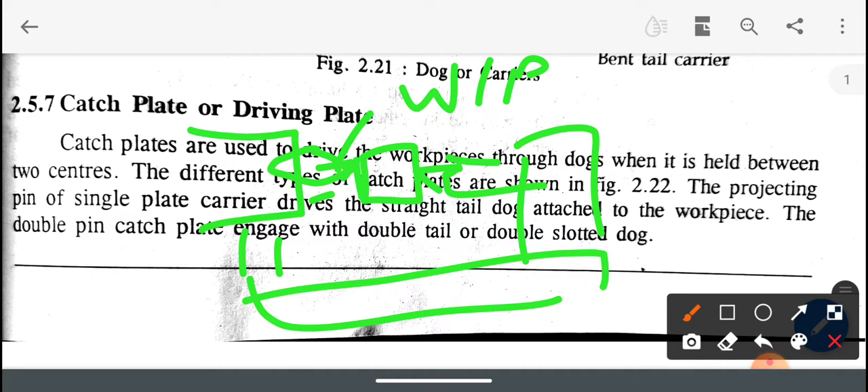When you hold very heavy workpieces between two centers, as already you know, a lathe machine has two centers. One is the headstock center where the workpiece is held. This is the workpiece, and on the lathe bed here is the tailstock, with the dead center in between, where the workpiece is held. So to drive very heavy workpieces we need good support, otherwise the job will be in vibration and there are chances of spoiling the machine surface.

So that's why, to protect the workpiece from damage or to give good grip, we need catch plates to drive the workpieces between the two centers. What are the different types of catch plates, we will discuss next.

We have got here the single pin catch plate. Here you can see the pin used is single, that's why it's called single pin catch plate.

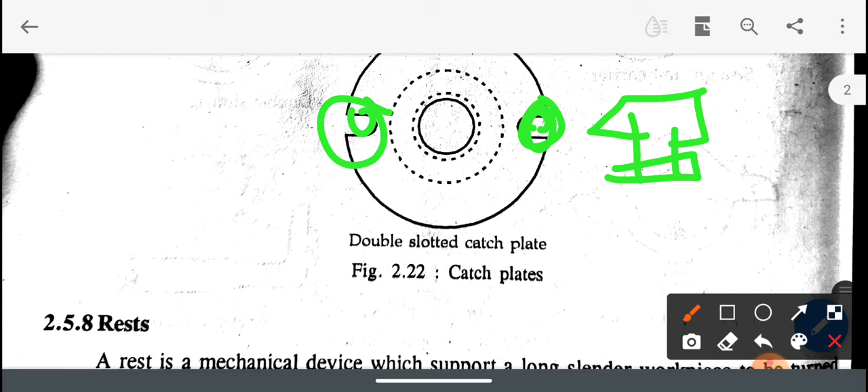Double pin catch plates, here the pins are two. Then there is the double slotted catch plate. Double slotted catch plate means here with the help of bolt and nut arrangement, what happens is it will be locked to the dog in this slot, and this catch plate is used to drive the workpiece. So to show this, I will show you a small video on YouTube so that you will understand clearly.

The animated video will help you understand very easily. These are the catch plates.

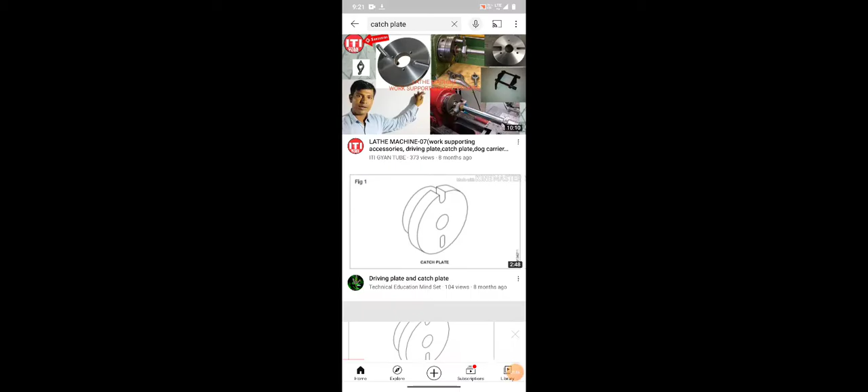I am looking for the animated videos.

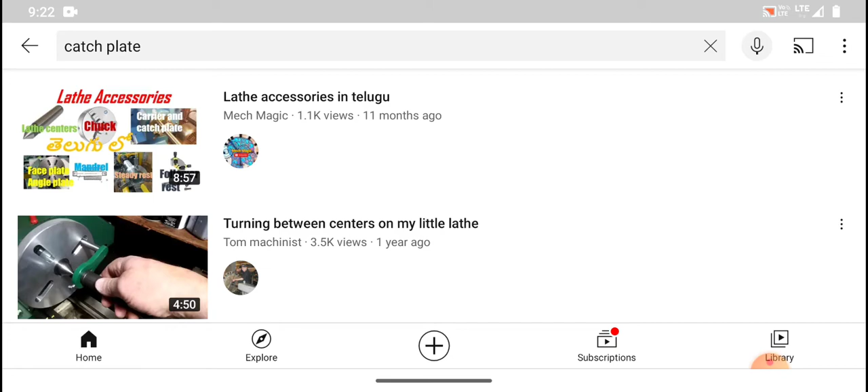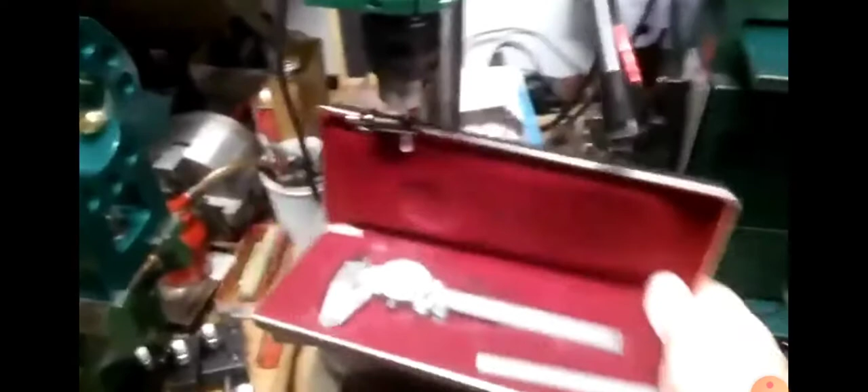You can see the lathe attachments. Welcome to my little machine shop. I have a toolbox, I have a drill press, just a little Harbor Freight drill. I'm going to try and do all of this one-handed, so forgive me if it gets a lot shaky and stuff.

But I'm going to loosen up my tailstock here and pull it back. I'll loosen it more. And out pops, hello, out pops the part. I have a center in.

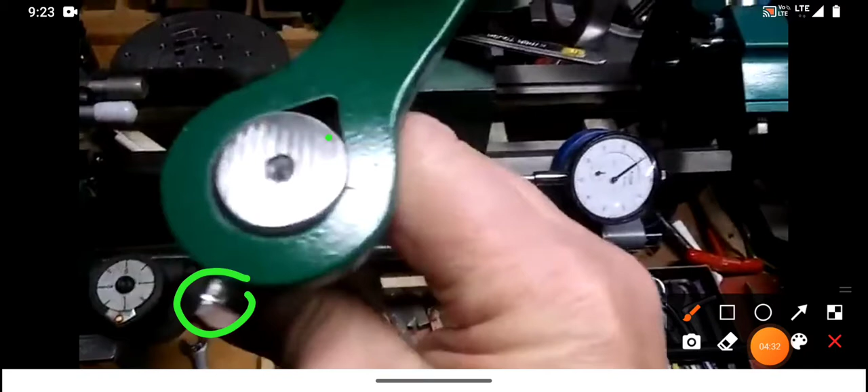This is one example of what is called the carrier. With the help of this screw, the workpiece is held and is rotated between the centers. This is a simple example of how catch plates will also be used.

At that end, in the tailstock end, I have a live center. This is called a live center, a number 3 Morse taper center locked into the spindle of my lathe. And this is my dog driver plate.

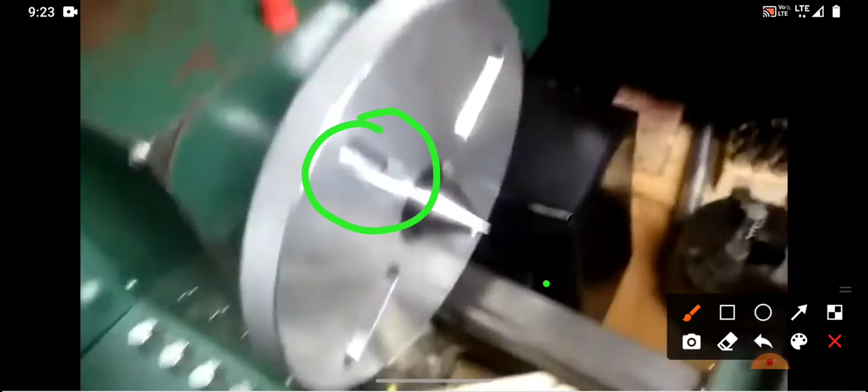Some people call it a face plate. It's really not, it's a driver plate. Down there is my face plate, that's made of steel with lots of tapped holes in it. This is just a dog driver.

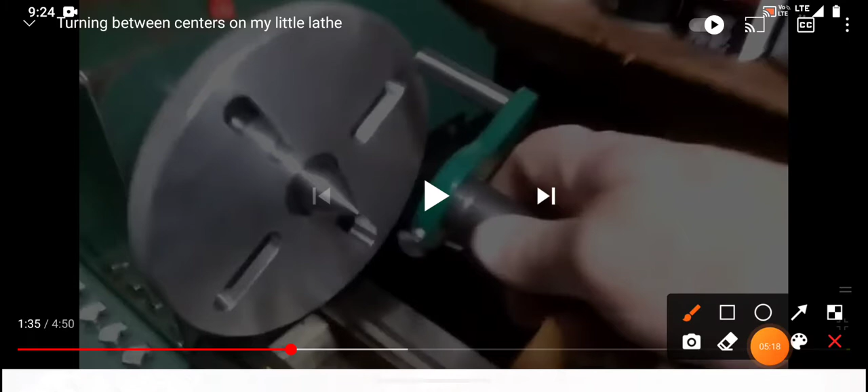This is the catch plate. So you have got one slot, two, three, four slots are there for holding this carrier. It is used - just see how it will be held here. This is a driver dog, which locks onto the part with a set screw.

Yes, I painted it green to match my machine, haha. But basically this tang here gets driven because it's engaged into one of the slots, and then the live center goes into that.

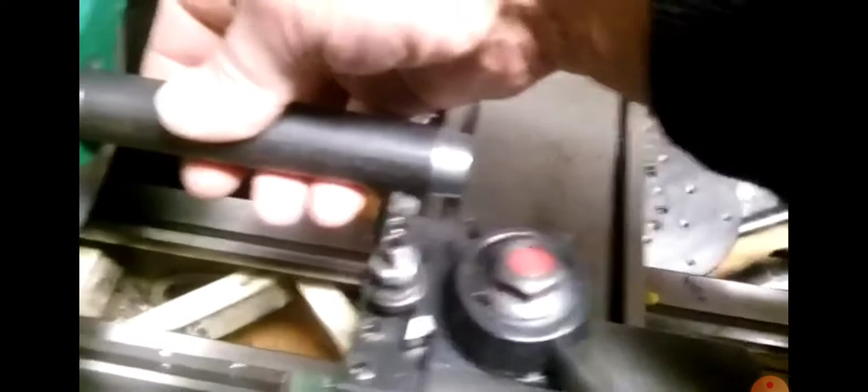And I can't do this one-handed, but I'm going to bring the tailstock back up and mount the part in there, so just hang on a second. Oh, there's plenty of tension now.

This is a live center where you have a driver dog like that. Most of the time we're just using a chuck in the spindle of the lathe, and then we support our part if it's longer than 3 diameters.

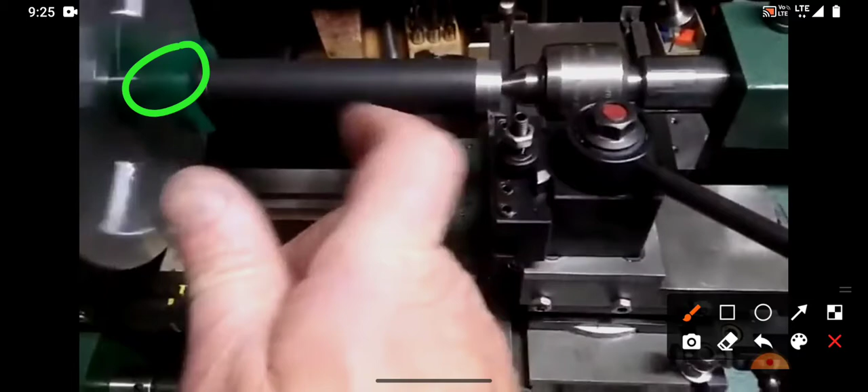When the job needs to be held between the two centers, we require big catch plates, and this is what your carrier is.

Sticking out, then you have to have the support of a center, of a tailstock and center. By the way, there's my steady rest, which I built, and I'm not using it at the moment, so it's locked down back here out of the way.

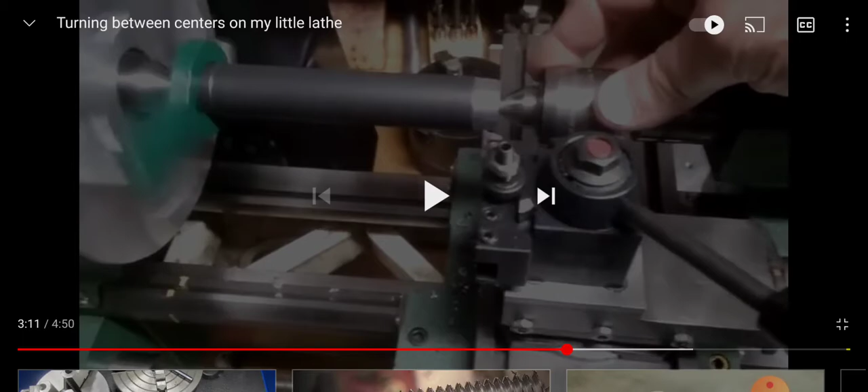It is called steady rest, which I built. Steady rest is used for very long workpieces. It consists of one screw over here and another screw over here, and in between this job, a very heavy, lengthy job will be held here.

One side it will be supported, and at the other, center - right? So this is called the steady rest.

And I'm not using it at the moment, so it's locked down back here out of the way. So anyway, I'm going to go ahead and dial in a cut on my machine.

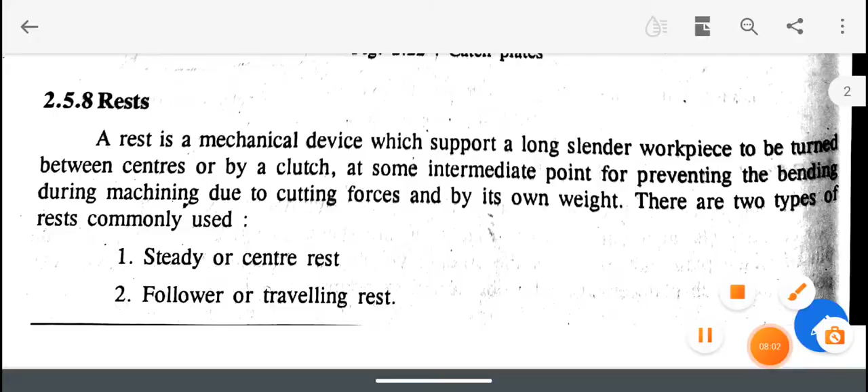Now we will discuss about rests. What are the different types of rests? Rest is a mechanical device which supports a longer workpiece to be turned between the centers or by a chuck at some intermediate point, for preventing bending during machining due to cutting forces and its own weight. There are two types of rests commonly used.

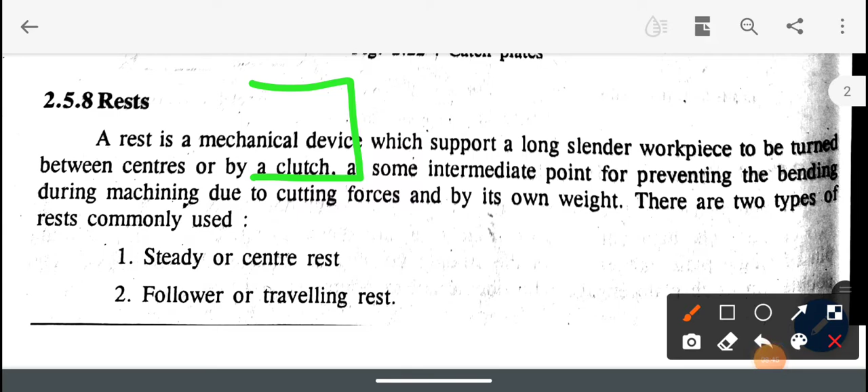One is steady rest and the second one is follower or traveling rest. When a very lengthy job needs to be machined, it is held within one center. Because of its heavy weight, this job will get vibrated, and there are chances of bending along the length of the job.

So to give proper grip at the end, rests are used at the other end. The stock is removed, and at the middle this steady rest is used. We will discuss how it is used. This is steady rest, or center rest.

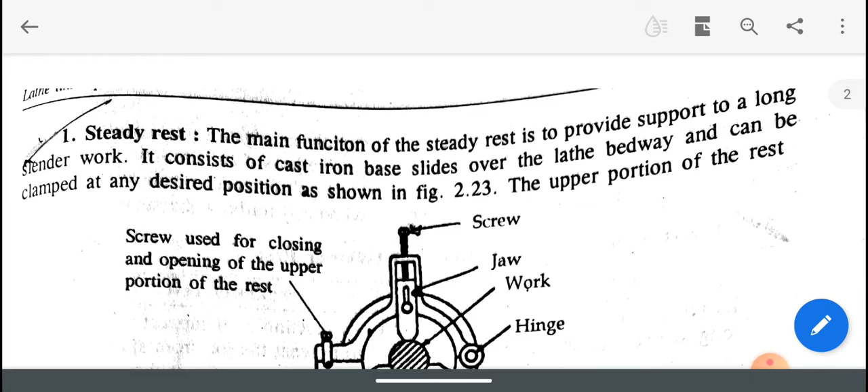Here you can see the diagram of the steady rest. It provides support to a long slender workpiece, and it consists of a cast iron base that slides over the lathe bedway. It can be clamped at the desired position wherever you want on the lathe bed.

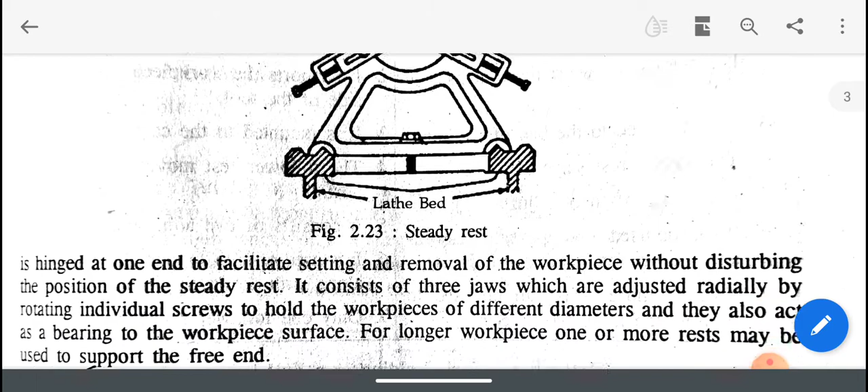The upper portion of the rest is hinged at one end to facilitate setting. These slide ways are the lathe bedways. The lathe consists of bedways, and on this bedway the steady rest can be set and moved to whichever position you want on the lathe.

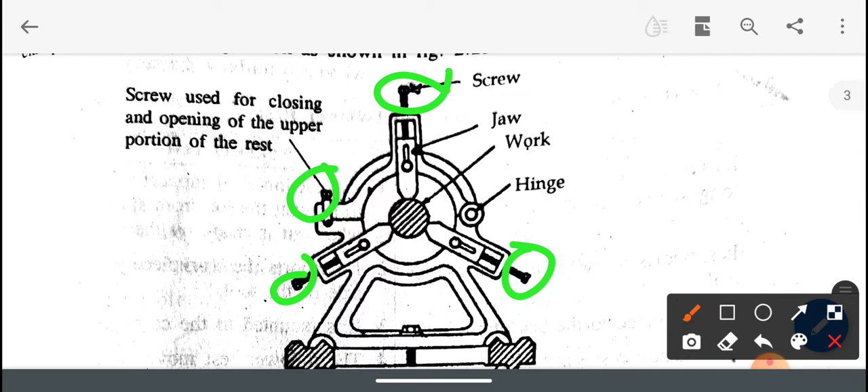Here you can see the diagram of the steady rest. Two set screws arrangement will be there for the upper portion of the rest for holding, and three screws for holding the job with jaw arrangement will be provided. All three jaws will be set for holding the very long job. This is called steady rest, and it can be held at any position on the lathe bed.

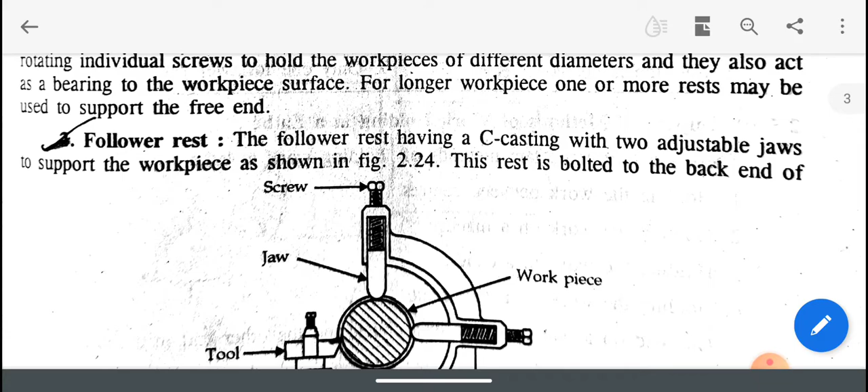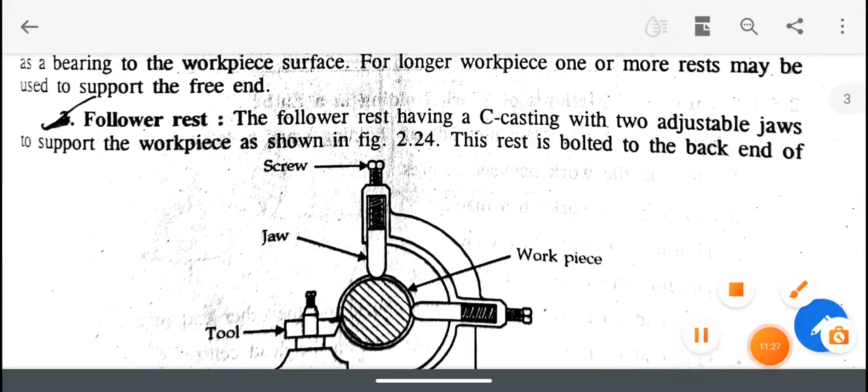Next comes the follower rest. The follower rest has a C type of arrangement, and one side is totally open. It has a C-shaped arrangement with a double jaw. Here you have only two jaws, whereas in the steady rest you have three jaws.

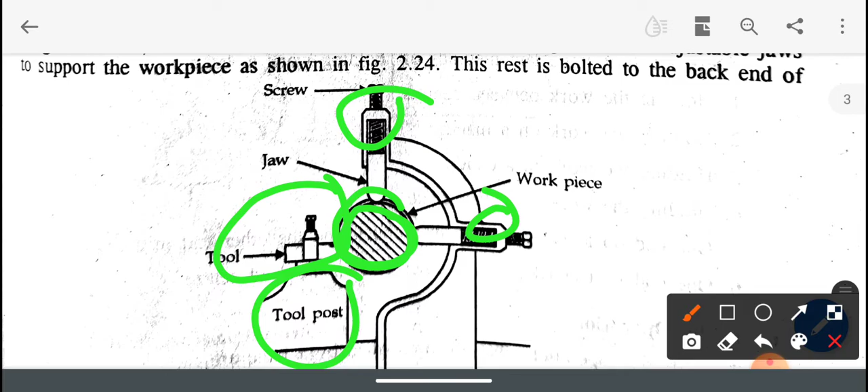Here you can see the example where the machining tool and tool post is brought, whereas the workpiece is held in the set screw jaws, two jaws. The main advantage of this follower rest is that in the steady rest, machining cannot happen apart from where the entire steady rest is.

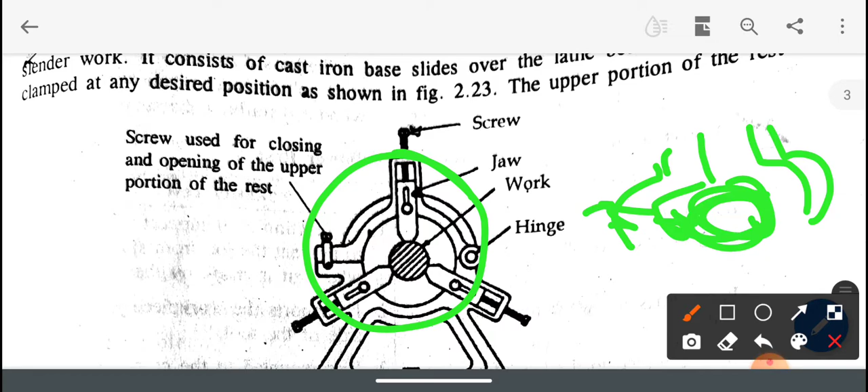For example, wherever the steady rest thickness is, you cannot machine that portion of the workpiece length. Whereas in the follower rest, along the entire length of the workpiece, machining can be done easily because it is open at one end. This is the advantage of the follower rest - throughout the length, the job can be machined and turned.

But in the steady rest case, it is held at a fixed point, and only up to that length it can be turned. The job needs to be reversed for turning the remaining part in the steady rest setup, whereas in the follower rest, the entire length can be machined.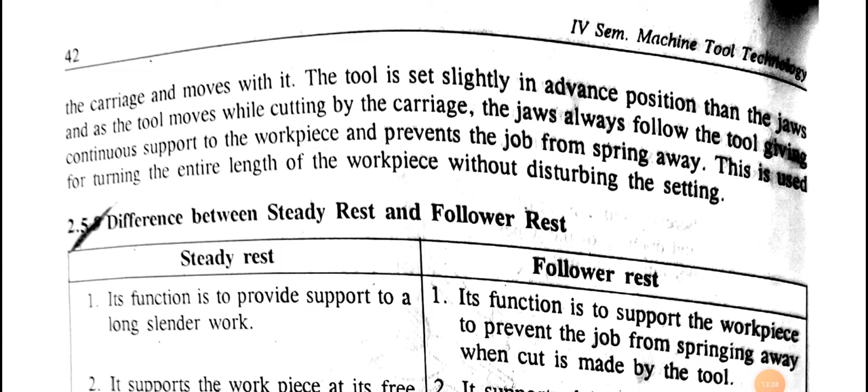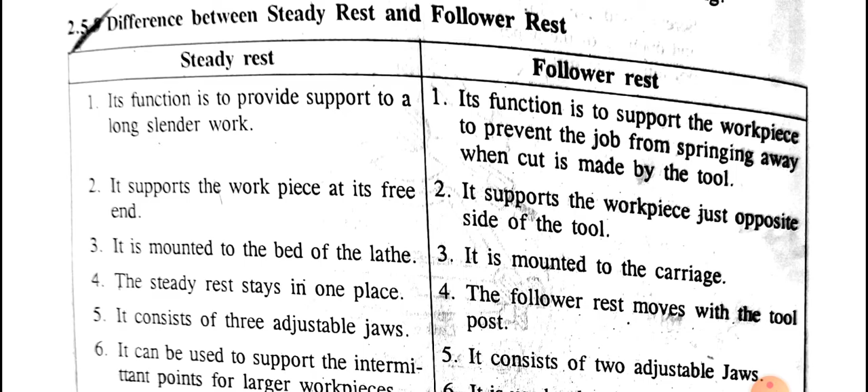What is the difference between the steady rest and follower rest? The steady rest's function is to provide support to a long slender work - very lengthy jobs use this type of rest. The follower rest's function is to support the workpiece to prevent it from springing away when the cut is made by the tool. That is the main difference.

The steady rest supports the workpiece at its free end, while the follower rest supports the workpiece just opposite the tool. In the steady rest, the workpiece is supported in the middle, so machining happens in halves - the job is held with three jaws, one from here and another from here. This arrangement supports the job at the free end, and machining can be done only up to that point.

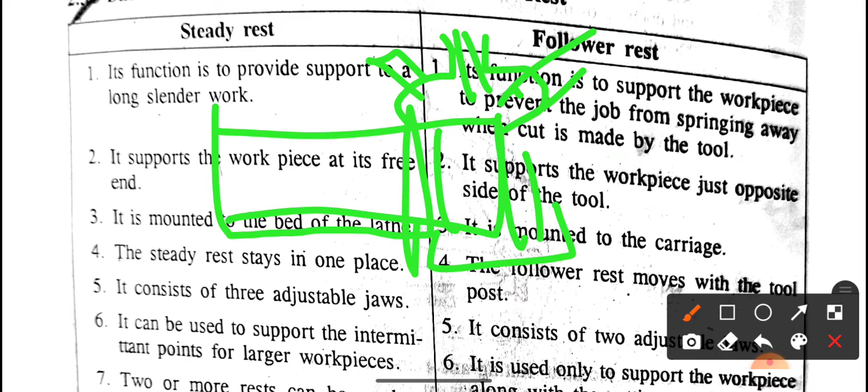Whereas follow rest, if you take it, it consists of C type of arrangement. C type of arrangement means the entire length can be machined easily. Here the jaw will be supported at one end. So this is the advantage of follow rest. What I'll do is I will try to send some videos with steady rest and follow rest so that you'll understand clearly.

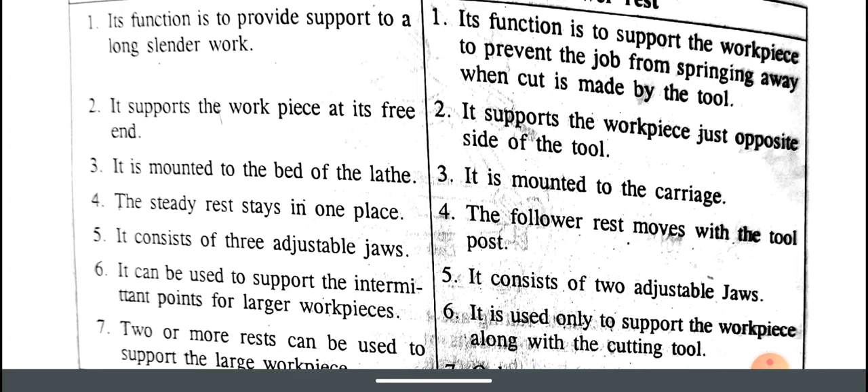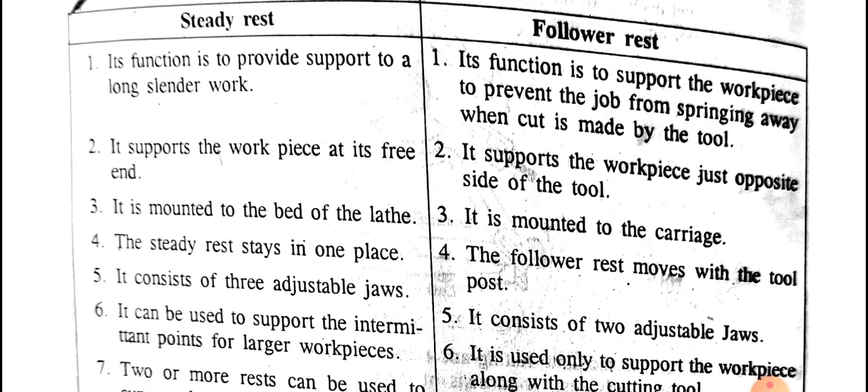The steady rest is mounted on the bed of the lathe, whereas the follow rest is mounted on the carriage. The steady rest stays in one place. The follow rest moves with the tool post wherever you want to get more grip. The steady rest consists of 3 adjustable jaws, whereas the follow rest consists of 2 adjustable jaws.

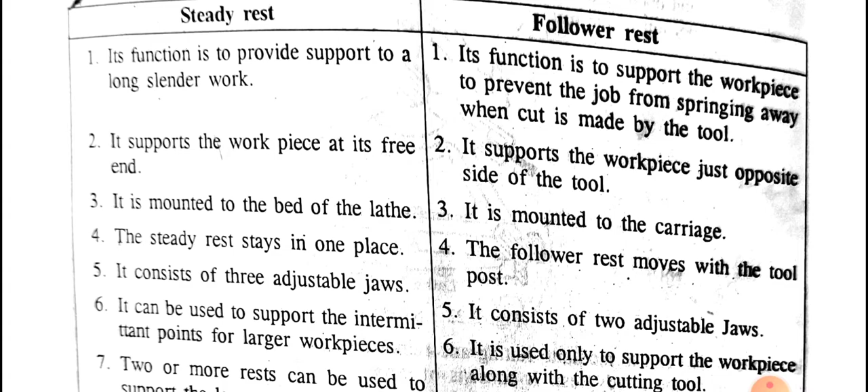These are the differences given here. The main simple differences you can remember: in steady rest it consists of 3 jaws, whereas in the follow rest it consists of 2 jaws. Steady rest is supported at the free end, and the follow rest is supported just opposite the cutting tool. Steady rest is mounted on the lathe bed and follow rest is mounted on the carriage. Steady rest stays in one place and follow rest moves with the tool post. Remember these simple differences. This will be a very important asked question: write the difference between the steady rest and follow rest. Make it perfect.

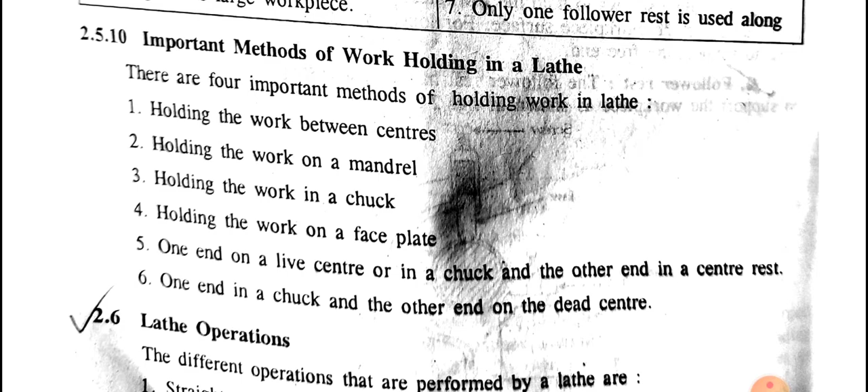What are the very important methods of work holding in a lathe? There are 4 important methods: holding the work between the centers, holding the work on the mandrel, holding the work in the chuck, and holding the work on a face plate. Live centers in a chuck, one end in a chuck and other end in a dead center. These are the different methods used for holding the workpiece, which we have already discussed. Now we'll discuss one by one.

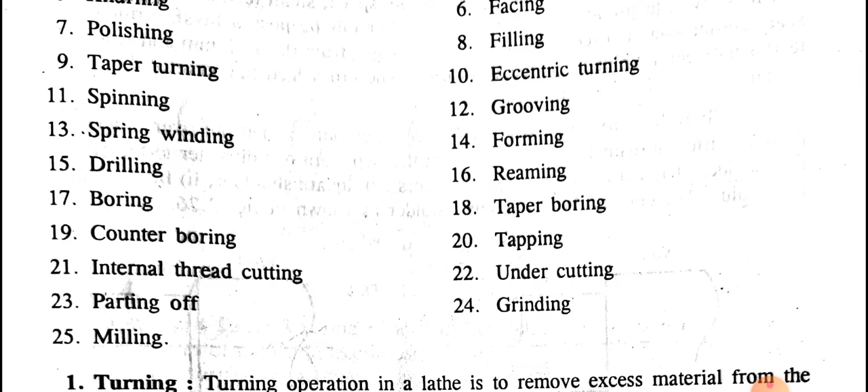The next part of this lathe machine is the different lathe operations we will perform: straight turning, shoulder turning, chamfering, thread cutting, knurling, facing, polishing, filing, taper turning, eccentric turning, spinning, grooving, spring winding, forming, drilling, reaming, boring, taper boring, counter boring, tapping, internal thread cutting, undercutting, parting off, grinding, milling.

Around 25 operations, even more, can be performed, which will be developed by the machinist through his own experience. We will discuss them here one by one.

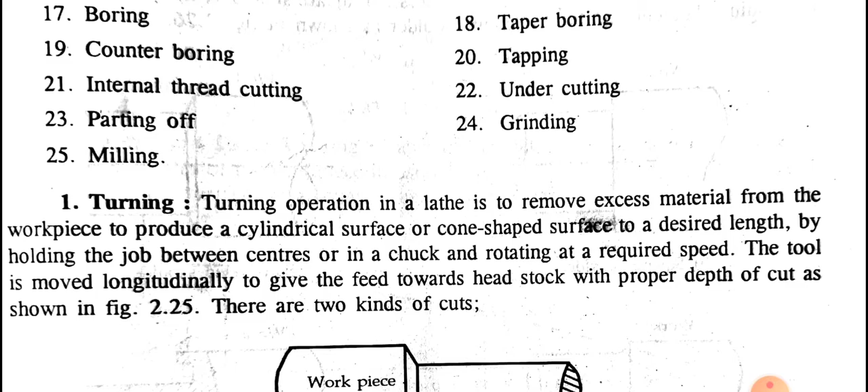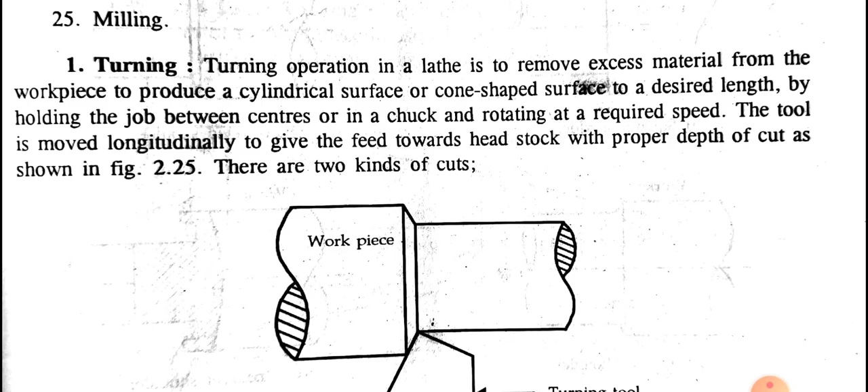Turning operation. What is turning operation? This is a very simple concept. Turning operation in a lathe removes excess metal from the workpiece to produce a cylindrical surface or cone-shaped surface of desired length by holding the job between the two centers—one at a chuck and another supported by using the dead center at the tailstock. The tool moves longitudinally to give feed towards the headstock with the proper depth of cut.

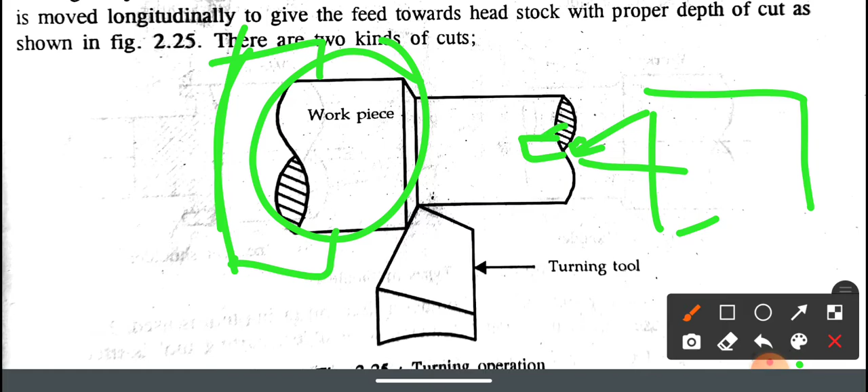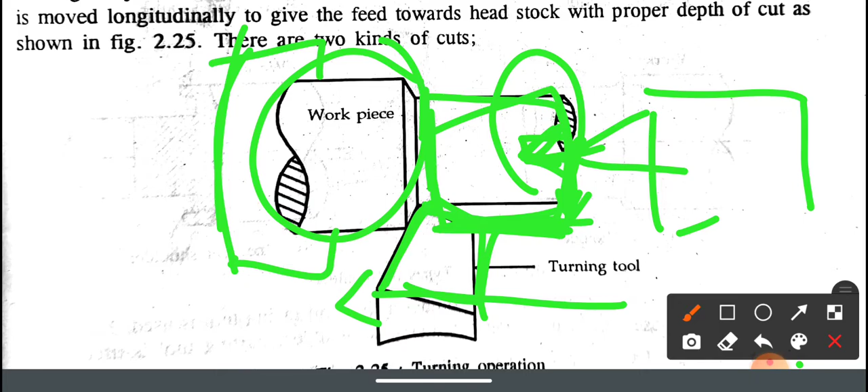There are 2 kinds of cuts: one is called rough cut and another is called finish turning. Here you can see the workpiece is held in the lathe chuck at one end, and the other end is sometimes supported in the tailstock, sometimes not. A counter-sinking hole is made here, and this is the tool. The job starts rotating, and this turning tool cuts across the length of the workpiece, along the entire length of the job.

What is rough cut? Initially, a heavy amount of material needs to be removed, so at that time we remove material using the rough cut. The feed rate is from 0.3 to 1.5 mm per revolution of the work, used for casted jobs where more allowance is given. Finish turning is used after rough finishing, and nowadays it's done on CNC machines to get micro and very high accuracy and finishing. Finish turning uses a high cutting speed, small feed, and very small depth of cut to produce a smooth surface.

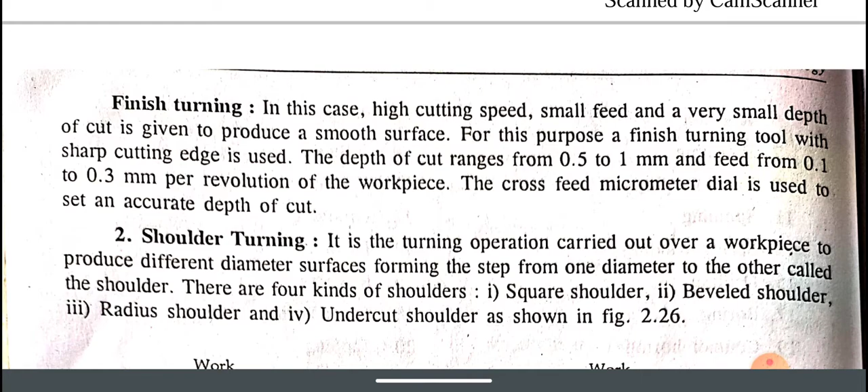Here the depth of cut ranges from 0.5 to 1 mm, whereas in rough turning it is 2 to 5 mm. See the difference: in rough turning it's 2 to 5 mm, while in finish turning it's 0.5 to 1 mm. Feed is from 0.1 to 0.3 mm per revolution of the workpiece. The cross feed micrometer dial is used to set an accurate depth of cut.

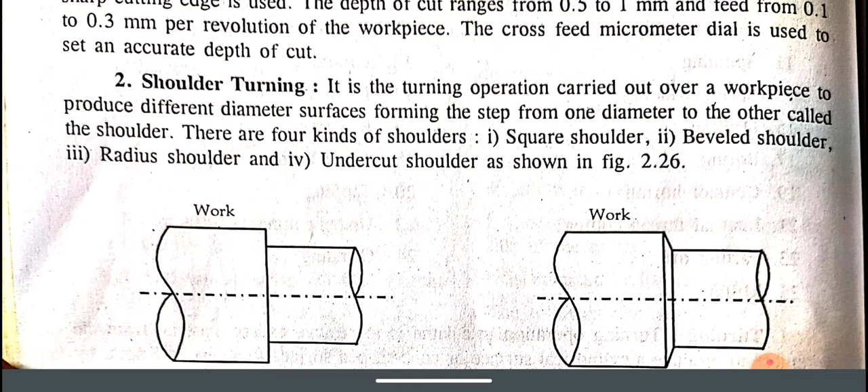Next comes shoulder turning. Shoulder turning is the operation carried out on a workpiece to produce different diameter surfaces, forming the step from one diameter to the other, called the shoulder. There are four kinds of shoulders: square shoulders, beveled shoulders, radius shoulders, and undercut shoulders.

Here you can see the different shoulders: square shoulder, beveled shoulder. Then the radius is provided here by using the radius tool, and here you can see the undercut type of shoulder.

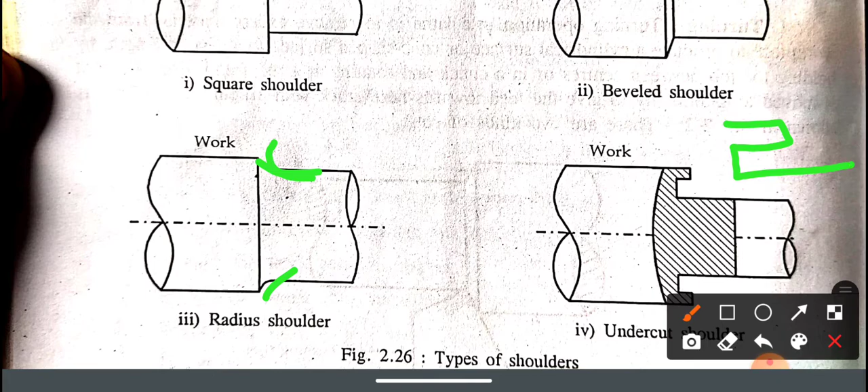So these are the different types of turning. One is the turning operation, in which you get shoulder turning.

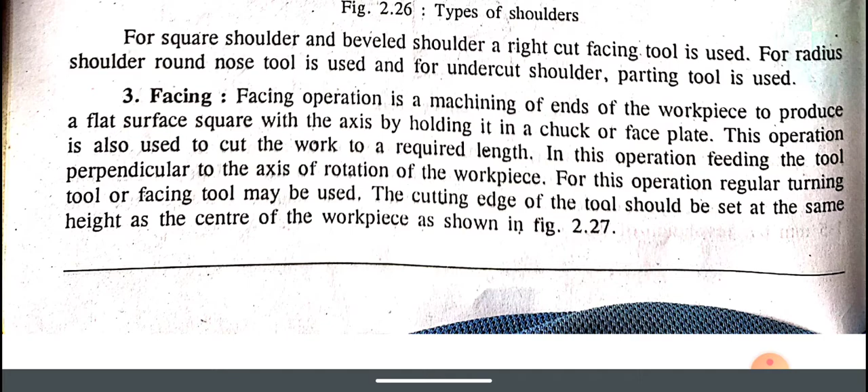Next comes the facing operation. Facing is the operation of machining at the end of the workpiece to produce a flat surface square with the axis, by holding it in a chuck or a face plate. This operation is used to cut the work to a required length, feeding the tool against the workpiece. Here you can see the facing operation.

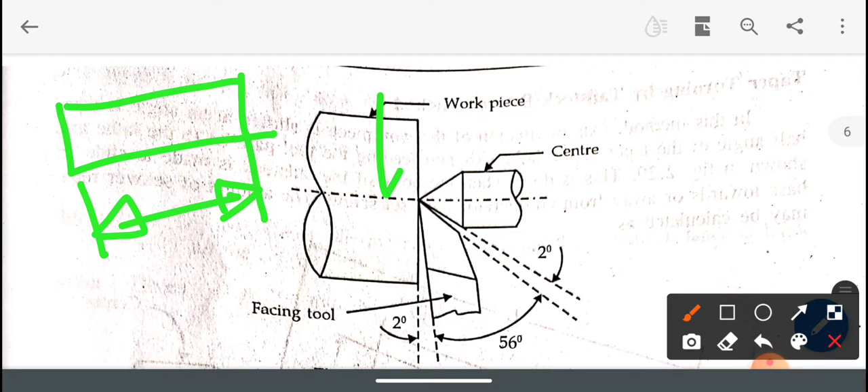Whenever you take any job, since the raw material workpiece is very lengthy, you cut the job to a required size, making it into small pieces like 100 mm. After cutting, both ends are not accurately flat. To make this accurately flat, and if a length of 100 mm is required...

you cut at 102 mm or 100 mm plus 2 mm extra, keeping 2 mm extra to make both ends exactly flat. This 102 mm is then made into 100 mm by the facing operation, by machining at the ends.

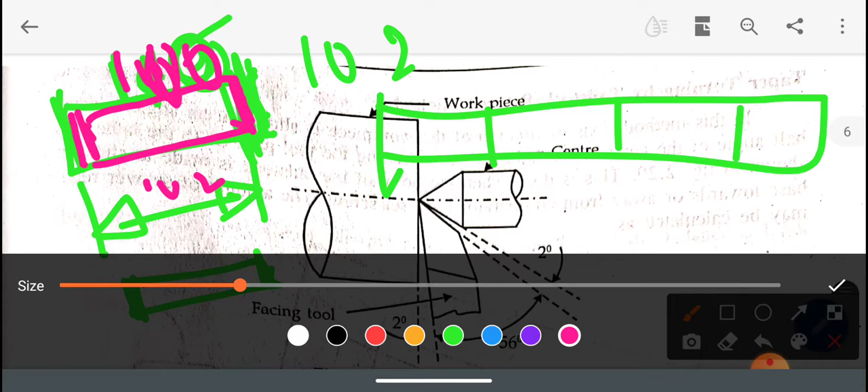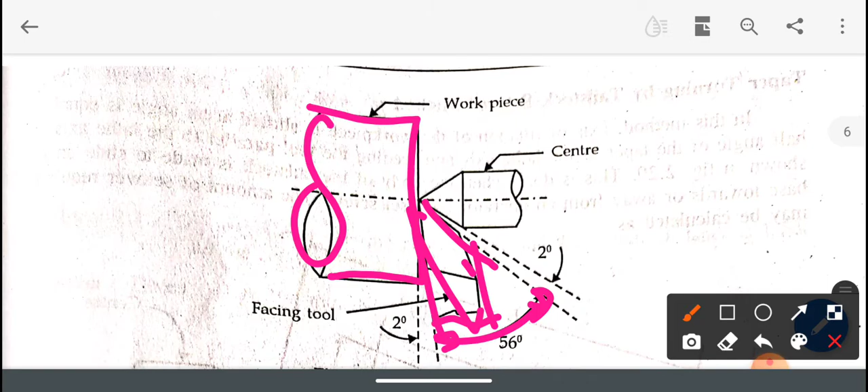Here you can see the diagram of the facing operation, where the workpiece is turned at some angle. They keep this at 56 degrees along the workpiece center, and facing is performed up to half, because the job rotates 360 degrees, but only half, staying at one center as we move the tool.

Next comes taper and taper turning. Taper turning is the operation of uniform increase or decrease in the diameter of the workpiece measured along its length, because in so many cases we need some taper, so during that time we need to machine the job at some taper.

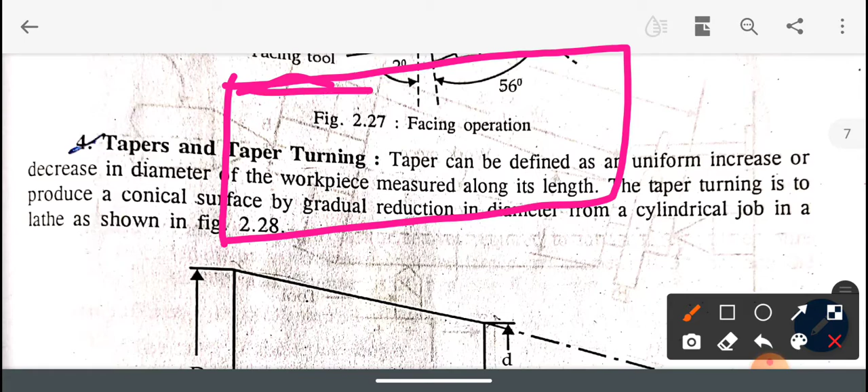What is taper? Take your workpiece like this, and you need it tapered like this, right? This material is to be removed, then the workpiece becomes like this. This is called taper. One end you want 50 mm, and the other end you want 25 mm or 30 mm. This is called a taper job.

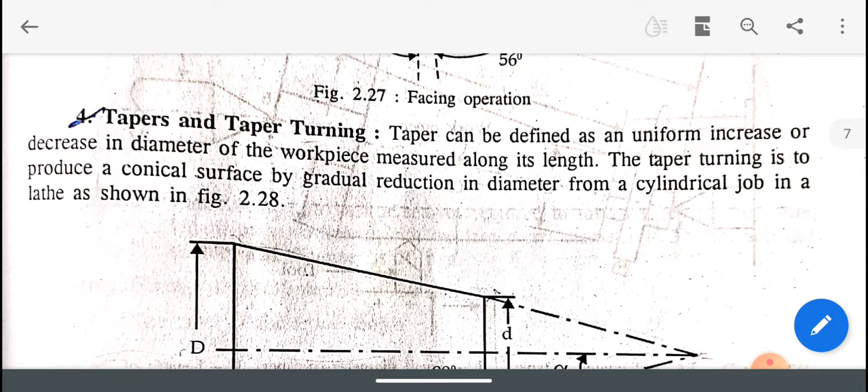So that is what we call uniform increase or decrease in diameter along the length. Taper turning produces a conical surface by gradual reduction in diameter from the cylindrical job. Here you can see the taper job shown here. This is the taper turning at the other end.

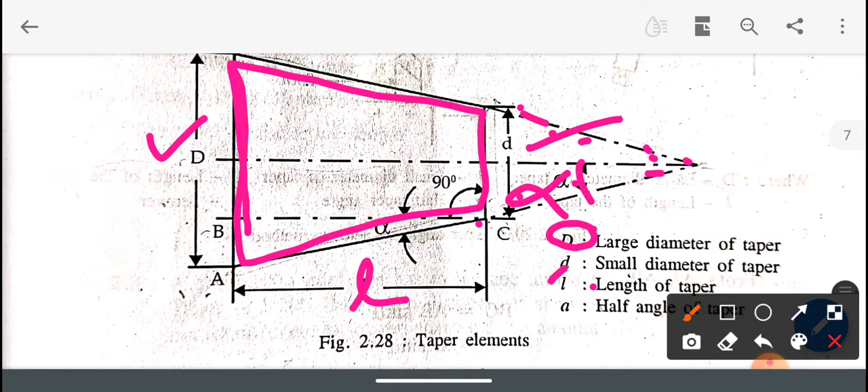When they connect, they get an angle here, alpha. Here you can see D means large diameter, small d means small diameter, L is the length of the job, and alpha is the half angle. These are the elements of the taper.

Taper may be produced by feeding the tool at an angle to the axis of rotation of the workpiece in a lathe. Taper may be turned by any one of 5 methods, and these are very important - any one method they will ask in the exam: taper turning by using a broad nose form tool, taper turning by tailstock set over method, taper turning by swiveling the compound rest, taper turning by using taper turning attachments, and by combination of longitudinal and cross feed in a special lathe.

Most university syllabuses commonly use the taper turning by compound rest method. Questions will be asked repeatedly, and in workshops too they use the same method for turning purposes, along with taper turning by tailstock set over method.

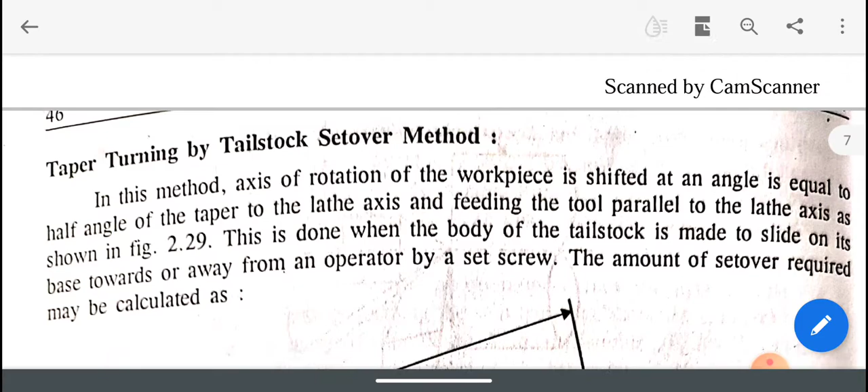So once again, the types: taper turning by using the broad nose form tool, tailstock set over method, taper turning by compound rest method, taper turning by using taper turning attachments, and by combination of longitudinal and cross feed in a special lathe.

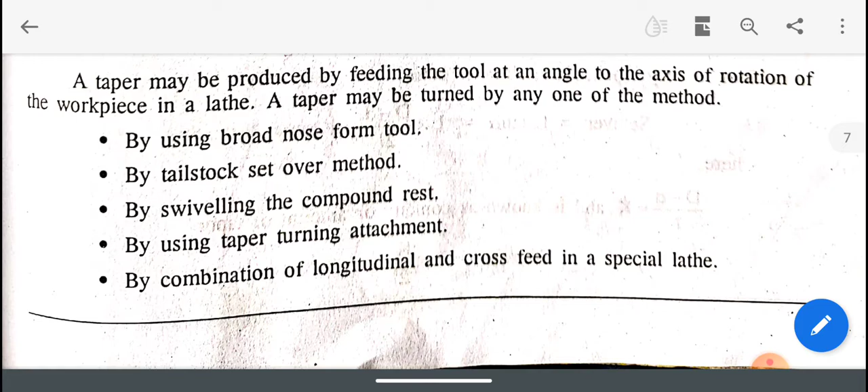Now we will see the first one: taper turning by tailstock set over method. Here you can see taper turning by tailstock set over method. In this method, the axis of rotation of the workpiece is shifted at an angle equal to the half angle of the taper to the lathe axis, and feeding the tool parallel to the lathe axis as shown in the figure here.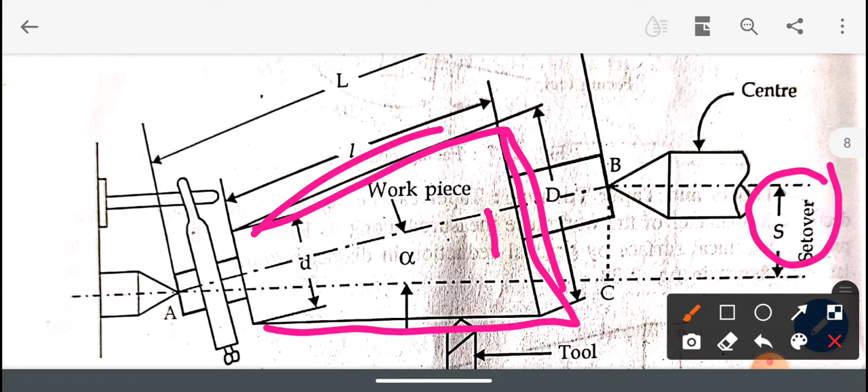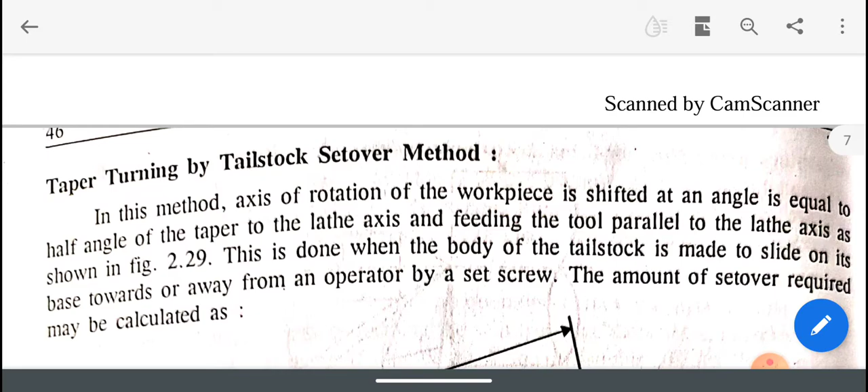So here, the tailstock is set at some angle, called set over. Here you can see the arrangement of the job and how it is turned. By setting over the tailstock, the taper turning method itself involves setting over the tailstock - meaning the axis of rotation of the workpiece is shifted at an angle. The tailstock needs to be set at some height, and the job is held at some angle, producing the taper.

Here you can see, from an exam point of view, practice this diagram.

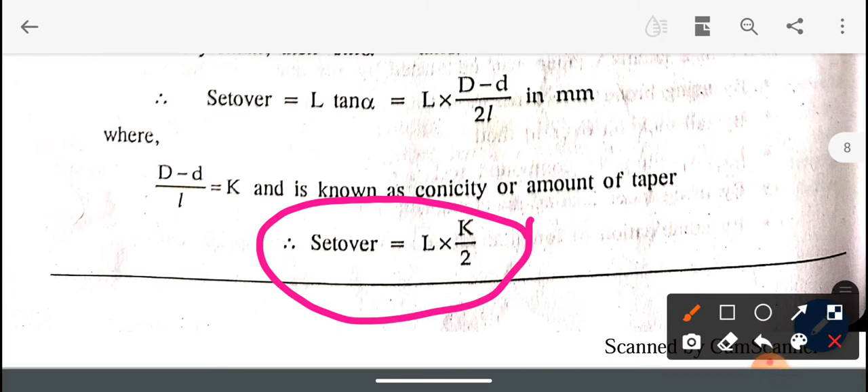Here the calculation is given for the set over. Set over is equal to L tan alpha, where L is equal to L into D minus d divided by 2L in mm, and finally you get the set over. The formula is set over equals L into K by 2, where K is known as conicity or amount of taper. Here the taper turning is done for the entire length, then small l is equal to capital L, so capital L into D minus d divided by 2L is the formula.

Here one example is given. The length of the workpiece is 200 mm and the amount of taper is 1 is to 50. Find the set over required.

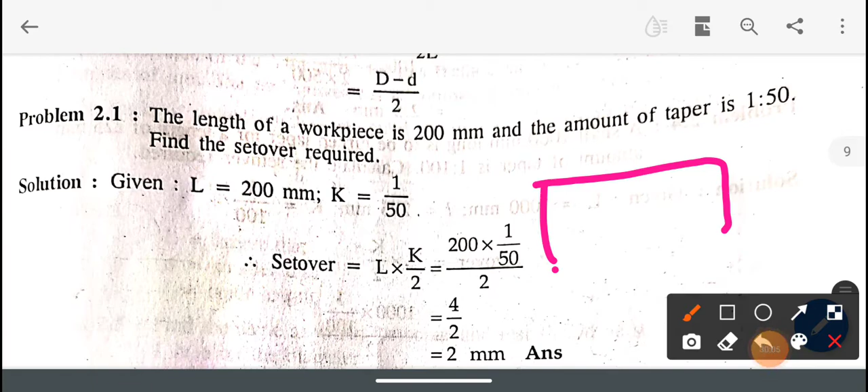What is 1 is to 50? If you consider a job of 50 mm length, 1 mm will be the taper. If it is 100 mm, what is the taper? Then it becomes 2 mm. You need to calculate it by putting it in this formula. But importantly remember, for 50 mm, 1 mm taper; for 100 mm, 2 mm taper.

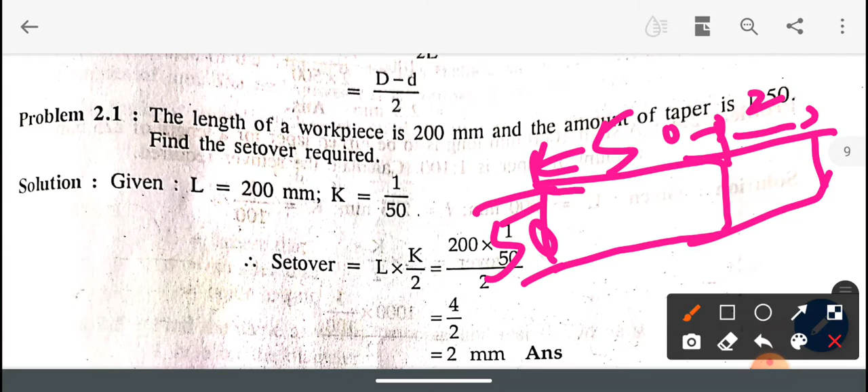L is 200 mm, K is equal to 1 by 50, that is the taper ratio. Put it in the formula: set over equals L into K by 2. 200 is the length and K is 1 by 50, the taper ratio. So we get 4 by 2, that is 2 mm is the set over. You need to set the tailstock accordingly.

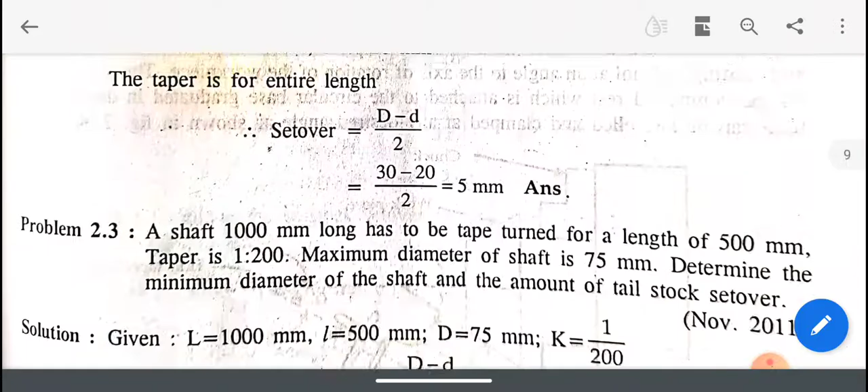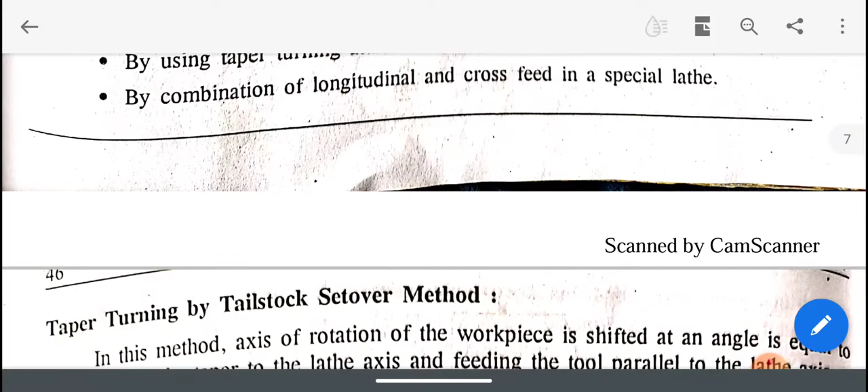Compound rest method will be discussed here. This compound rest method part is not taken now, notes have not been taken for it. So I hope you understood the different methods.

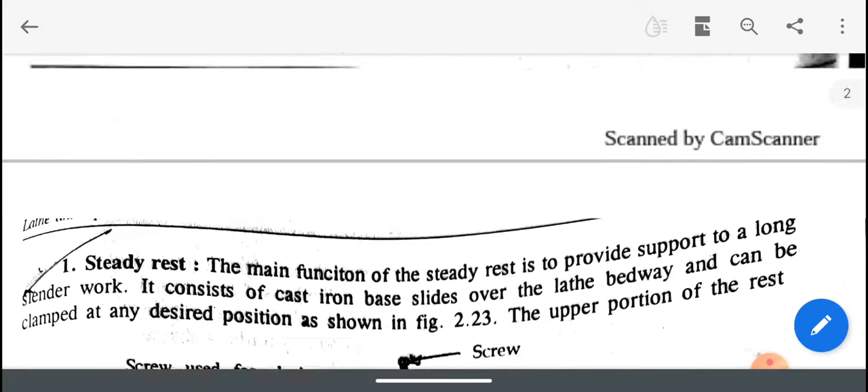Whatever I discussed now, let us overlook all the things we discussed till now. We have discussed mainly what catch plates are and different types of catch plates or driving plates. Catch plates are used to drive the workpiece through dogs when it is held between the two centers. I also showed the video on this. There are single pin catch plates, double pin catch plates, double slotted catch plates, and then we discussed about rest. What is rest? Rest is a mechanical device which supports a long slender workpiece to be turned between the centers or by a chuck.

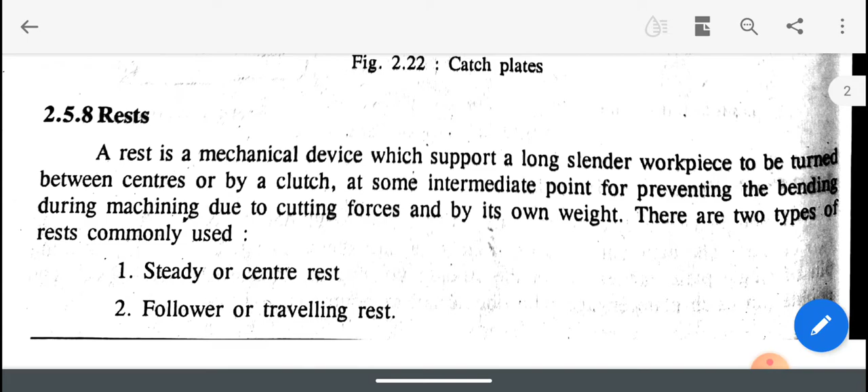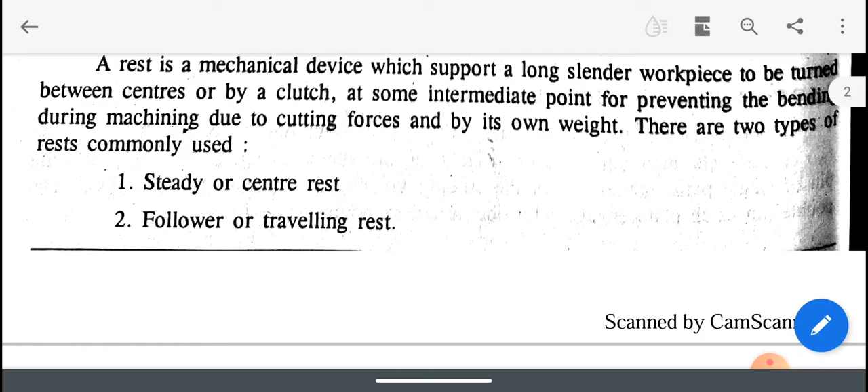To prevent the bending of a very heavy lengthy job, and to prevent vibrations, we use a steady rest. Take the example of JCB cylinder and connecting rod arrangement, or making of power packs, where we require a very lengthy connecting rod. That time we need to use this steady rest or follower rest. In most hydraulic industries they are using this, even for casting automobile parts and for machining automobile parts.

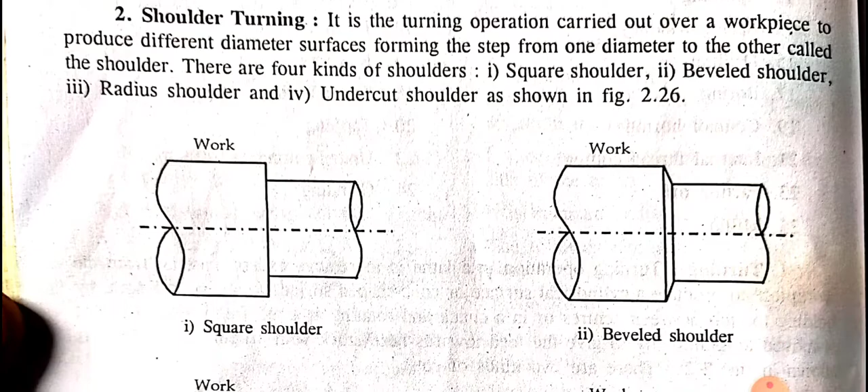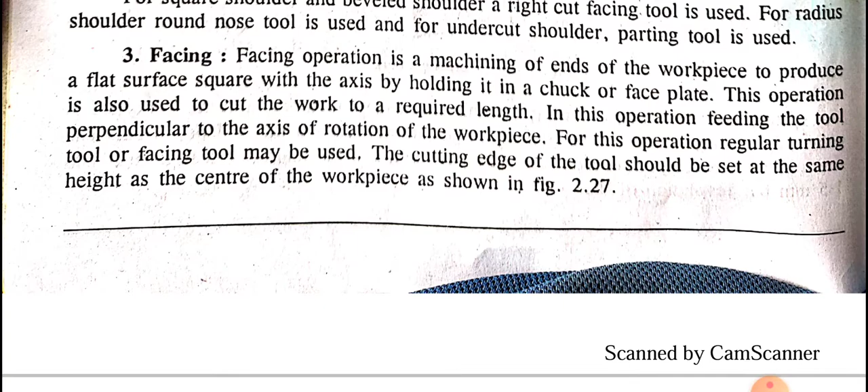Steady rest, you can see the diagram. Follower rest, these differences are discussed. The lathe operations, turning operations - in that you have two types, rough turning and finish turning. Then shoulder turning, you have four types: square shoulder, beveled shoulder, radius shoulders, and undercut shoulders. Then we discussed facing operation to make both ends flat and reduce the length.

Taper turning we have discussed only two methods: taper turning by the tailstock set over method. In the next class I'll discuss some other methods of taper turning.